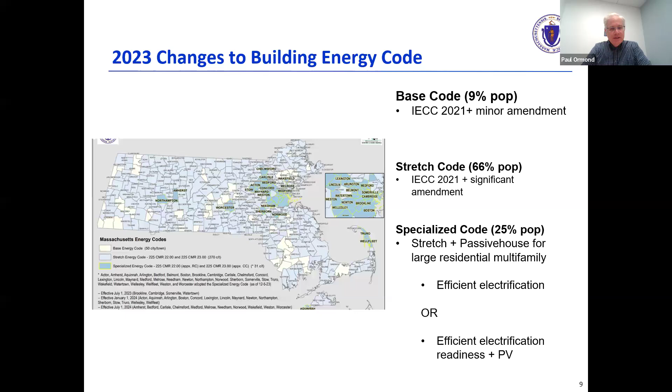You can skip to the next slide. We're going to skip some of these intro ones here and save some time. Next, okay, we'll start there. So we'll get right into the particular updates we're proposing.

There's a total of 3 updates. The first update is to create a pathway that will greatly simplify the MEPA process for projects that voluntarily opt into agreeing to construct their buildings to GHG best practices that we identify.

For buildings that propose to build to those best practices, they'd be eligible for this opt-out, and there'd be no evaluations and review necessary from that point on. If the building did not choose to go down this pathway, then the MEPA review process remains much like it is today. So it's completely optional to do this opt-out.

The one change, if you choose not to conduct the opt-out, is that we'd ask you to evaluate a scenario that conforms to the opt-out, and then we can compare what you're proposing to do to that as well. So it's a completely optional thing.

It can be done to any level or extent that you wish, building by building. For example, if your project had 10 buildings, you could choose to make 6 of them comply with the opt-out appropriate for each, and they finish their review, while the other buildings go through the normal process. So it's designed to be flexible and optional for a project to take advantage of.

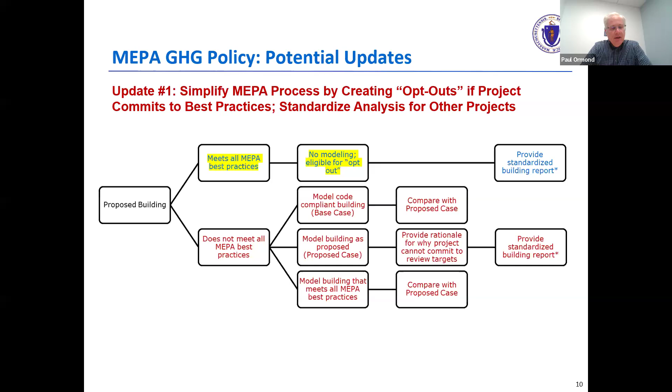At the end, we'll discuss the particulars of the opt-outs. Why don't you go to the next slide? We'll skip this one because at the end it has more specifics about the opt-outs.

This is update number 2. We're proposing to revise the way mitigation commitments are expressed. Currently, commitments are expressed as a percent better GHG reduction over a code base case. This is very out of date for the strategies necessary for successful decarbonization. The percent better doesn't really capture efforts towards electrification or EV readiness, things of that nature.

What we propose is to replace the percent better with specifics. For example, if a project is committing to electrification of space heating, that would be identified as a commitment, the same with water heating. Other characteristics would be improvement in thermal performance via a building's TEDI rating, air infiltration reduction, and things of that nature. Why don't you go to the next slide?

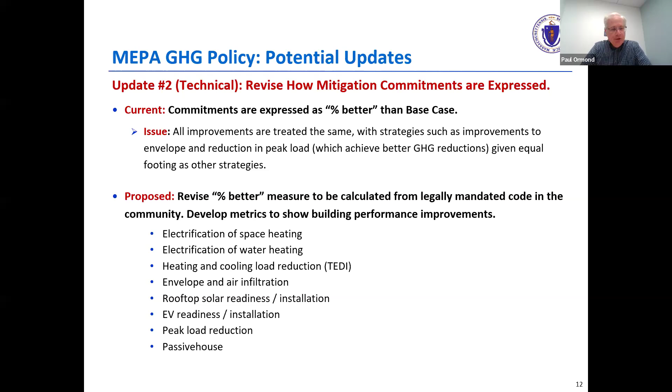The third update we propose is to update the grid emissions rate used in evaluations. Currently we use grid emission rates that are more or less current with today's electric grid. But this is out of date because the electric grid is getting greener with each passing year with the adoption of solar and offshore wind, and that's accelerating.

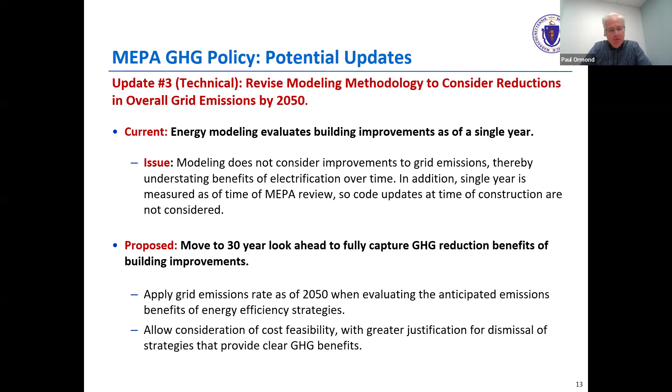So we don't think evaluations using current year grid emission rates are a good representation of the emissions of electrification options. We propose switching to a grid emissions rate consistent with what we think the grid will be 30 years out, specifically in 2050. That would be more representative of the building carbon footprint for the choice of efficient electrification. Would you go to the next slide?

So let's discuss these opt-outs in particular. They're tied to building size and building use type.

Next slide. For a non-residential large commercial building, except for those types indicated in the title, it's the same pattern: the all-electric pathway of the specialized code with lower air infiltration and air source heat pump water heating, or solar thermal with electric resistance water heating. But for a larger building, we would also add a requirement that glazed wall systems be used more judiciously, with a maximum of 50% of the above-grade vertical surface area. Next slide.

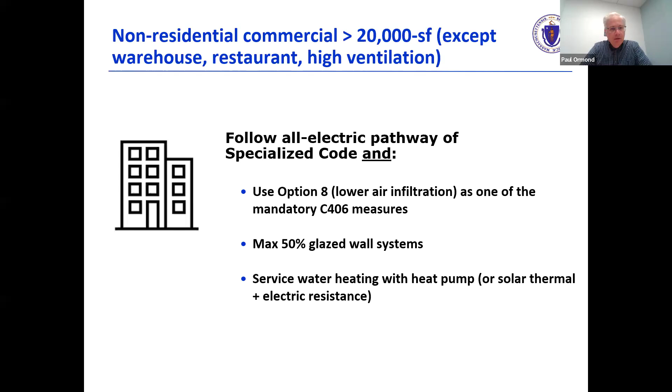So for high ventilation buildings, you would have a choice of being all electric or mixed fuel pathway. Now remember, either way, you'd have to use 25% of your peak space heating met with heat pumps. So it's sort of built into this. But you could choose to stay at just the 25% code required and do the rest with gas using the hybrid strategy that's common. Coupled with that, the low air infiltration, the max 50% glazed wall system, and then a similar approach for the water heating.

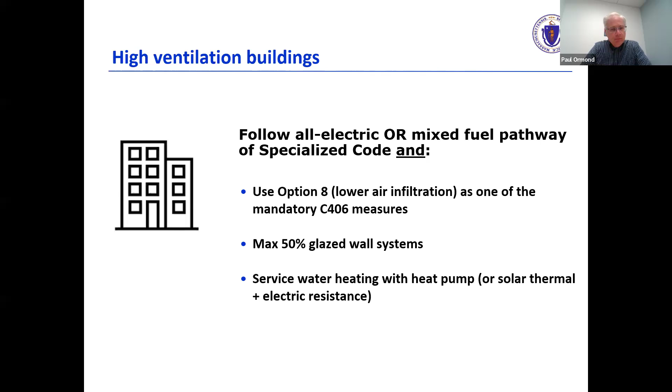For a warehouse, similar situation here. It could be all electric, or it could be hybrid with 25% of the peak load with heat pumps. The service water heating similar as the others. The one change here with respect to warehouse is to use a somewhat improved over code roof, with R40 specifically. That's identifying that a huge amount of the surface area of a warehouse, because of its large footprint, is through the roof. So that's worthy of improvement. And it's future-proofing things, because that same roof is also a good candidate for solar systems in the future. We want as improved a roof as possible prior to installation of solar systems, so we don't have to do any renovations or retrofits later.

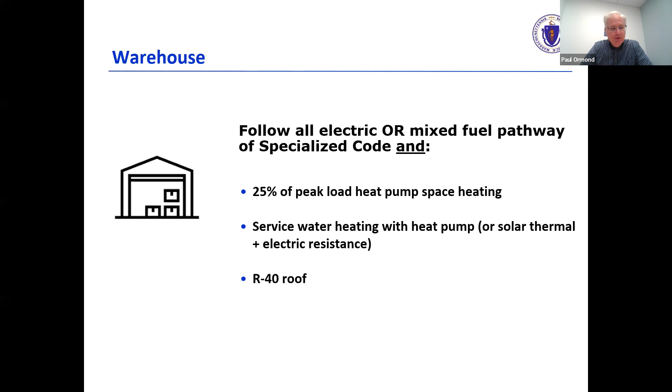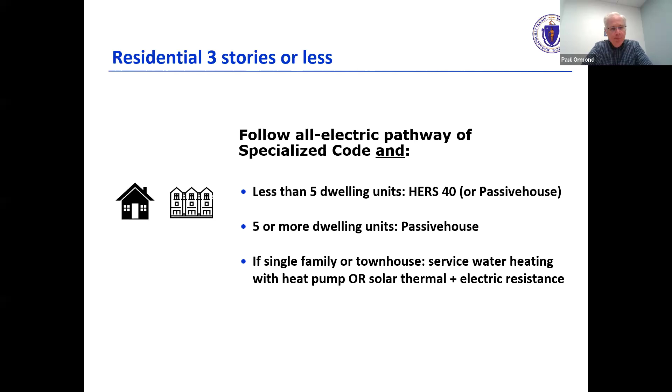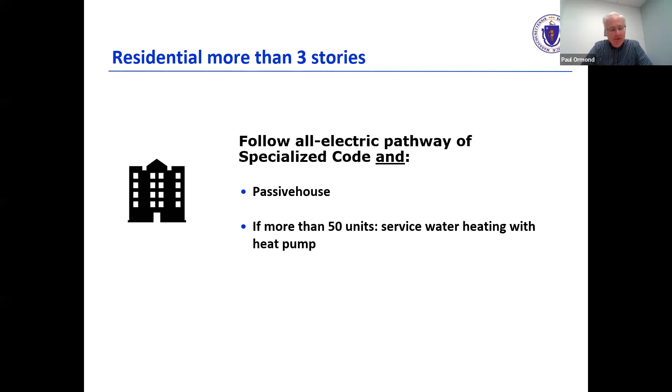I think that's what I have for this deck. Once again, to reinforce, the opt-outs are totally voluntary. So if for whatever reason you wish not to do one of the items, that is completely acceptable. We would just go through the same review process you do now. We would ask you to evaluate the opt-out scenario so we can compare and contrast and evaluate whether the alternative choice you have in mind might be just as good. So again, totally voluntary for the opt-outs. Hopefully something people would choose a lot, saving everyone time, costs, and headaches getting through the MEPA review process. Thank you.

Okay, thanks Paul. I know some of this is somewhat technical, but as Paul indicated, I'd characterize this change as largely continuing what we have been doing already since 2010. However, in some of the earlier slides that Paul skipped over, some of that background was the fact that through changes to the building stretch code put into effect recently in 2023, there have been a lot of developments and improvements in the legally mandated code for how new buildings should be constructed. So the concept here is at MEPA, if proponents are making high-level commitments along the same lines, MEPA review could be streamlined and made simpler. That's the high-level highlight for this change to stationary source.

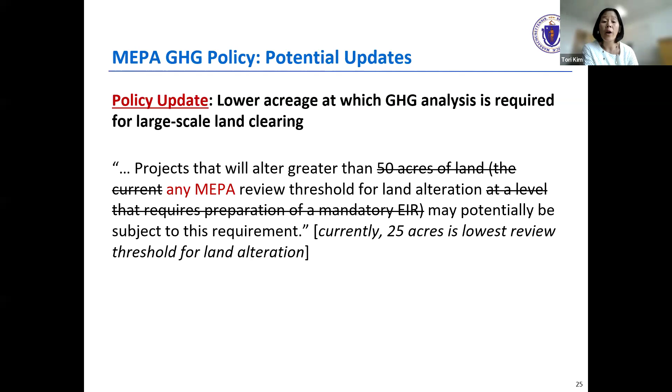Currently 25 acres is the lowest review threshold for land alteration. So obviously, if there is a regulatory change at a future time, that could be a different acreage. But as you just saw in the prior slide, presently 25 acres is the lowest review threshold for land alteration that triggers the need for MEPA review. So at 25 or more acres, the requirements of the GHG policy would now apply. Next slide.

We are also proposing to develop some associated guidance that would provide clear rules around how the carbon impacts of forest clearing should be assessed. Now, as some of you may know, this area is quite complex in terms of how to quantify the carbon effects of forest clearing.

So we are intending to establish a standard methodology using publicly available mapping tools. There would always be the option for the proponent to conduct a site-specific assessment, for instance, a forest inventory, at the proponent's election.

The guidance document would also provide mitigation options and best practices around how to mitigate the effects of forest clearing if that clearing could not be avoided or minimized, including items like reusing wood products, tree replanting, and permanent land conservation, as well as heat reduction strategies in overburdened areas.

We're also considering creating a fund, a type of in-lieu-fee mitigation framework. However, that would require a statutory change, so we're not proposing to create one through the policy, but we did want to at least mention the possibility in this straw proposal to solicit initial public feedback on that concept.

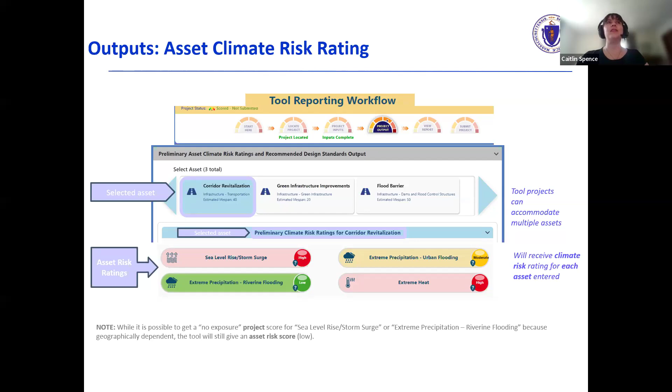Under each asset's risk rating - in this case, the risk rating for sea level rise and storm surge - the tool will provide a target planning horizon for each asset based on its useful life. In this example, the target planning horizon is 2070, so the tool recommends this asset be designed to function in 2070 sea level rise and storm surge conditions. The tool, in the case of sea level rise and storm surge, also provides an intermediate planning horizon for multi-stage design and an event return period.

In this case, the 2% annual chance flood. The tool also provides design criteria and preliminary design values for multiple coastal flooding parameters for the target and intermediate planning horizons and for the recommended return period.

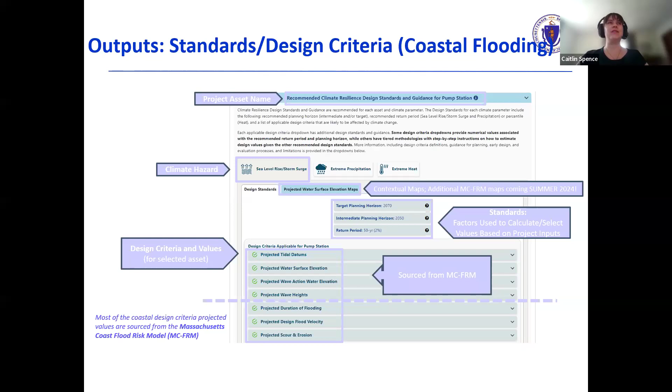Here's an example of what the expanded information for one of those coastal flood parameters looks like. There's an explanation of what that parameter is, and a table showing the actual elevation for that event in 2050 and 2070. There's also information expandable below on how that parameter can be used in different stages of the project life cycle, including project evaluation.

We wanted to highlight one tab under sea level rise and storm surge that actually shows maps of different parameters and elevations, so that users can get a sense of which parts of the project site are more and less exposed to coastal flooding. Additional parameters will be mapped in the version effective later this summer.

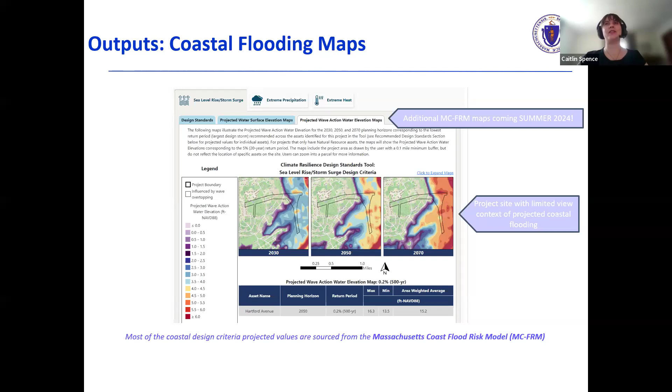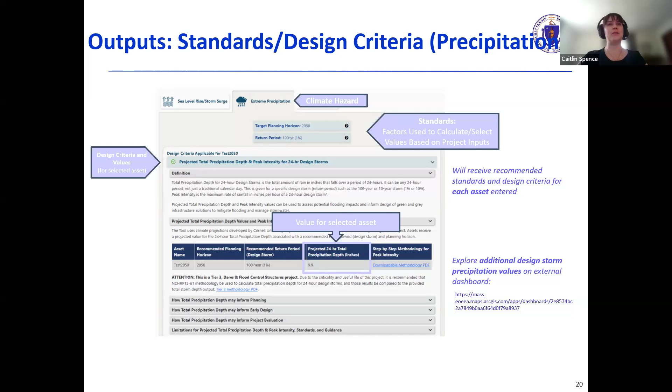So users can view the project output that I just highlighted within the tool. When users would like to see more of a summary, they can move on to the View Report step, which will provide a summary of the project exposure scores and the asset specific risk ratings for different climate hazards. So this is a way to see more of a report or summary format version of the project output.

There's also a download report button on this part of the page. The project reports can be helpful to save for future reference and attach to project filings. At this point, users can still make changes to project inputs and even project location if some of the details haven't been finalized yet.

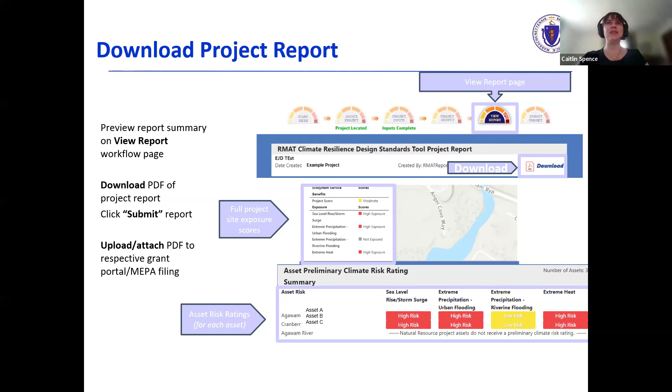On the next part of the tool page, users can submit this project so that it's stored in the Climate Resilience Design Standards tool database. After clicking the Submit button, users can no longer make any changes to the project information.

As Tori mentioned earlier, the beta version was released in April 2021. Several revisions have occurred since then, and the release of version 1.3 is in progress. This version will add updates to the temperature design standards and some additional maps showing coastal flood elevations. It will also add several bug fixes that have been flagged by users.

This is not part of the tool, but I wanted to flag the climate projections dashboard, which can be found on resilient.mass.gov. This is a website showing a more comprehensive set of projected temperature and precipitation statistics, some of which are pulled into the Climate Resilience Design Standards tool. So it is a helpful place to go if the starting set of recommended design criteria don't seem like enough to someone using the tool, or they want to explore other design storms or higher temperature standards or similar items.

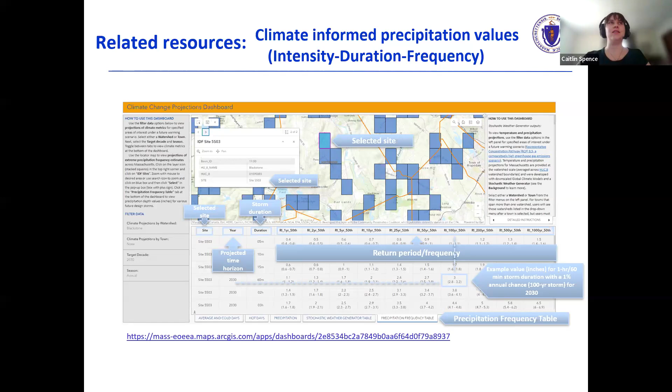I also wanted to highlight the resources available to learn more about the Massachusetts Coast Flood Risk Model data products, which are the main data source on coastal flooding brought into the tool. EEA's YouTube channel has 3 videos with documentation on using these data products at different levels in different applications. For users with advanced GIS and analytics capability, it's possible to download the flood risk rasters from the Woods Hole Group webpage. And for people who would just like to explore what the data look like, they are available on 3 different coastal flooding viewers.

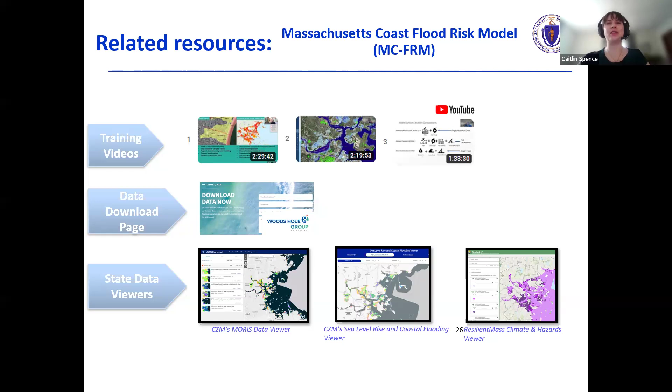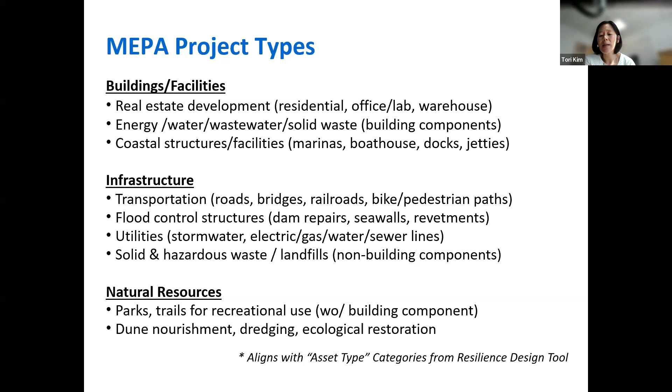So this is a visual depiction of the data. We thought it would be useful to divide our projects into FEMA zones: the V zone being the coastal areas that are subject to wave action, the A zone being the inland floodplain, the so-called 100-year floodplain that's subject to flooding risk, and then the X zone, which is outside the 100-year floodplain. So for this V zone, we think there's not a lot of surprise here.

64 projects in the V zone, and 62 were rated high. So all the red bars correlate to high risk, so vast majority rated high risk. For future risk for sea level rise, the tool incorporates data that allows you to look at future risk over the useful life of the project.

For the A zone inland floodplain projects, again, not a big surprise. The 2 middle bars relate to extreme precipitation. You can't add up the 2 bars because extreme precip is 1 category: it's either riverine flooding if you're near a river or a stream, or urban flooding. So again, 161 projects in the A zone, and a good majority of those, 113 to 125, subject to some form of extreme precipitation risk over the useful life of the project.

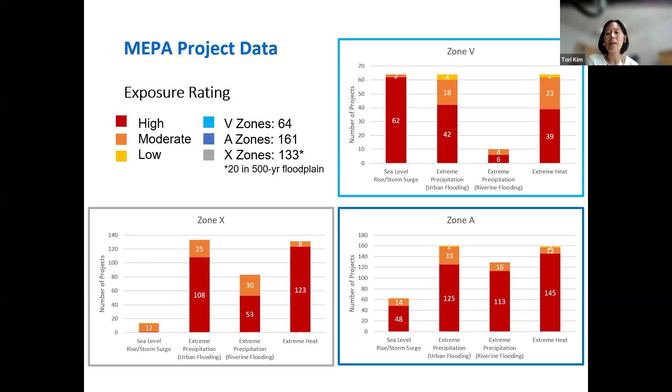We also collected some data related to projects near environmental justice communities. 224 out of 362 new project filings, and again we don't think there's a big surprise here, a good majority of those, 175, subject to high risk for urban flooding, given that many of these communities are in urbanized locations, and extreme heat as well.

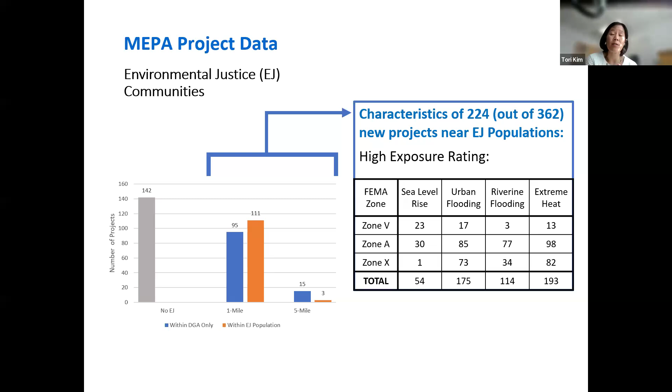One thing I forgot to mention in the prior slide is for extreme heat, we are seeing the vast majority of projects coming in rated as high risk for heat over the useful life. And as we see, even in the conditions this week, this is a very real prospect that all of us face in many places throughout the state.

Some key observations from our project filings to date. The first one is what I just stated earlier: we are definitely seeing that projects even outside the floodplain are being ranked high risk for flooding risks.

The so-called asset risk ratings, these are ratings that tie to the specific asset, like a building or a stormwater system, that a project is proposing, and the associated design recommendations are somewhat variable. We have determined that the climate tool was in fact designed to provide variable results because different assets may have differing levels of criticality—an emergency hospital for vulnerable populations, for instance, versus a recreational park that may not always be used.

However, we do think that at times these are dependent on user inputs, and we do think at times that the proponent filling out those inputs may not be assessing appropriately the criticality of a project. So this is something that we are looking to address through our policy updates.

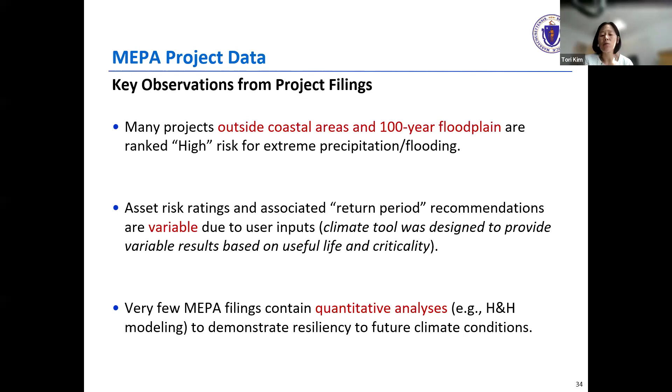And then finally, very few filings contain actual quantitative analysis to support the project design and to demonstrate resiliency to climate conditions.

Okay, so we'll move on to what exactly are we proposing for changes.

So first off, in terms of basic filing requirements, we are proposing to continue to require the standard output report from the resilience design tool. I think we've seen very good compliance with the requirement in the interim protocol, and from what I understand, the use of the tool is fairly easy, and it's not a heavy lift to attach this report to the ENF form. So we are proposing to continue with that.

We're also proposing to revise the ENF form itself to include some additional metrics, most of which can be taken directly from the output report that's generated from that tool.

We're also proposing to require things like the FEMA flood zone, just to get a very quick picture of whether the project is currently in the floodplain and whether a BFE, or base flood elevation, has been established. And then we would require, as is currently the case, a narrative discussion of whether the project is anticipated to be consistent with recommendations from the tool and a description of the measures that will be incorporated.